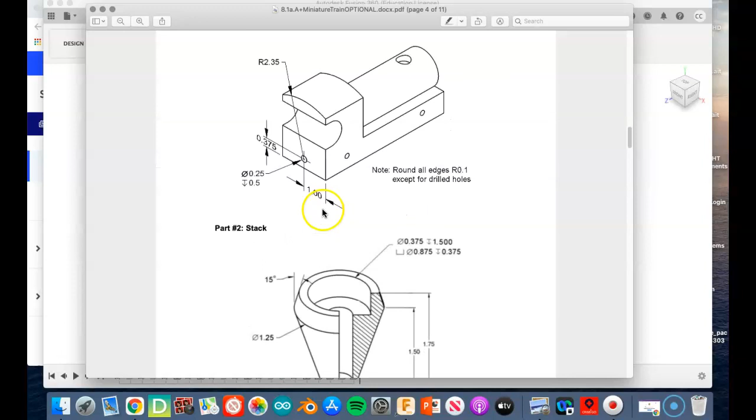Alright, train video number 2. We are going to make the stack. Now the stack is, let's pull that up real quick. The stack is looking like this, and there's a few different ways to make this. I found my preferred way is going to be using extrusions, lofts, chamfers, and a hole or two.

You could try to, with these dimensions, do a revolve. I haven't found that it's very successful. But it is a cylindrical object, so you could do that. I find that the extrude, then loft, then extrude, then chamfer, then drill a hole. That's my plan, and I'm going to walk you through that plan.

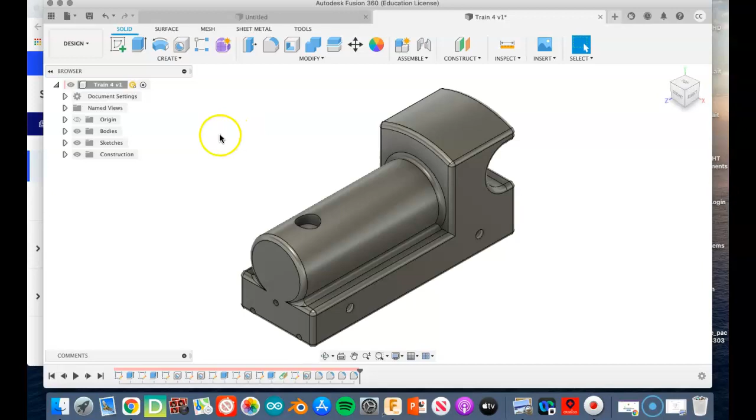So here's the train body that we made, and don't be alarmed, but we're going to make the body disappear. And now we're going to make a new sketch. We want to pick a plane. I'm going to pick this bottom plane here, this top-facing plane. And I'm just going to kind of come over here in space because I know the train is hanging out here somewhere. So I'm going to basically draw this thing off to the side with the intention that I would assemble it later. So I'm going to convert it to a component later and just assemble it using that joints thing that we did in class today.

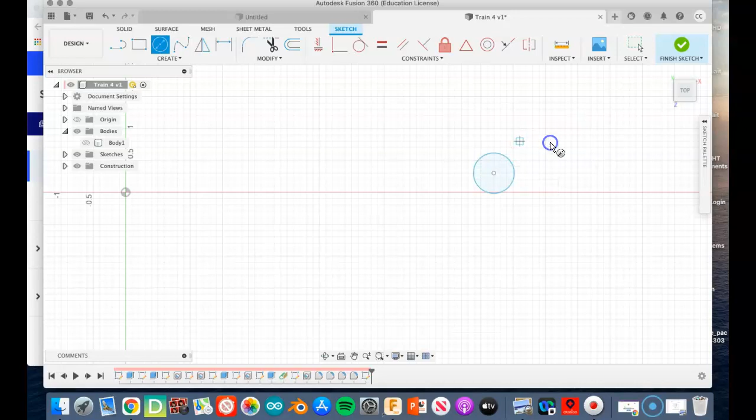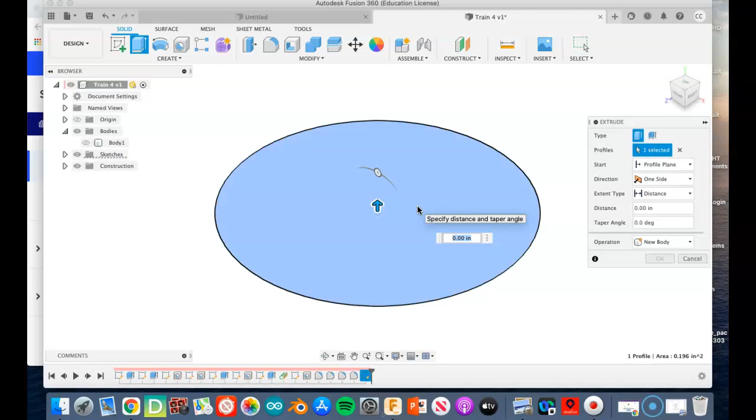So starting at the bottom of the stack, I'm going to dimension this circle 1/2 inch because that's what it says. And I'm going to finish the sketch. It should maybe hit the home so it gives me a little look. Now I'm going to extrude this, that first distance, which is 0.25. So here it goes, 0.25, and I'll get a little thing that looks like a hockey puck or something, right?

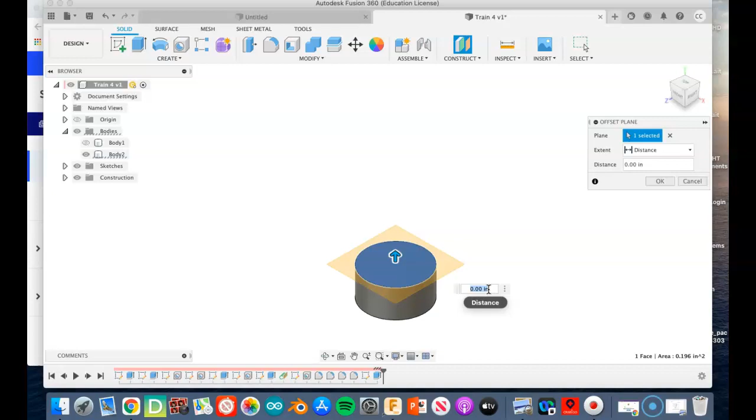Now, my next move is to loft up to another circle that's up here somewhere. So what I'm going to do is use an offset plane. I'm going to click this surface and then assign a value in the box here. And the difference, the top of this, where this circle needs to be drawn, is 1.5 from the very bottom. So we could say 1.5 minus 0.25 to get the difference. And that's just going to put this plane up here in space. And now that I've got a flat surface up there in space, I can put a sketch on it.

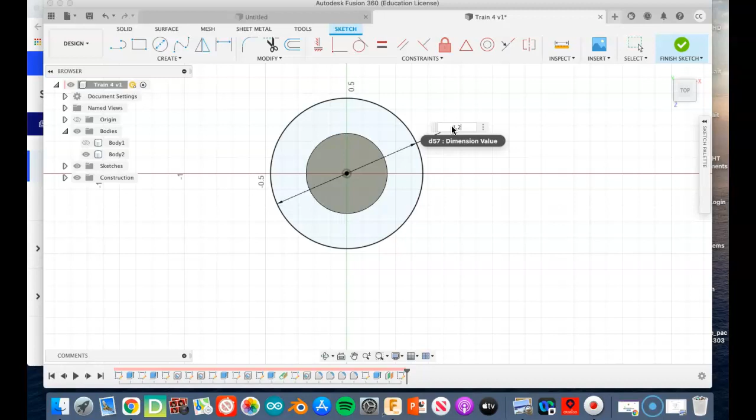I'm going to go ahead and draw the circle. I know it's bigger, so I'll click that, and then I'll click Dimension. And how big is it supposed to be? Well, it looks like it's a diameter of 1 1/4, 1.25. And there you have it. So we're going to finish the sketch. And now here's the cool move where you loft. A loft is hiding under Create, so find Loft, if your mouse works.

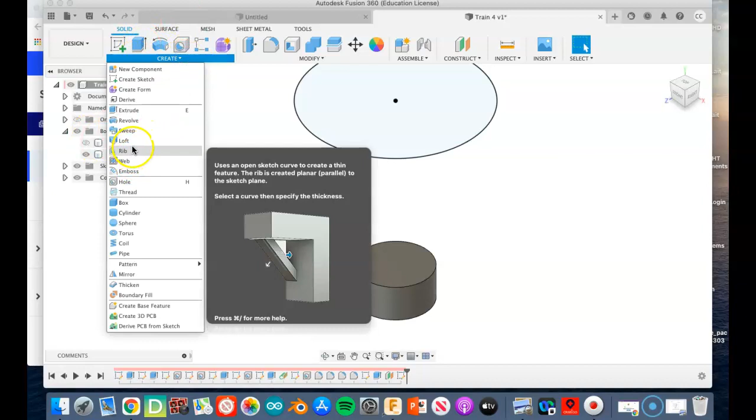There you go. My mouse is intermittent. All right, so I click the top of that. I click this. Why don't you worky? Let's cancel. We'll try again. Choose loft. Try to just get this edge right here. If we just get the edge, right? Not the whole face. Oh, there it goes. Boom. So now we've lofted from that to that.

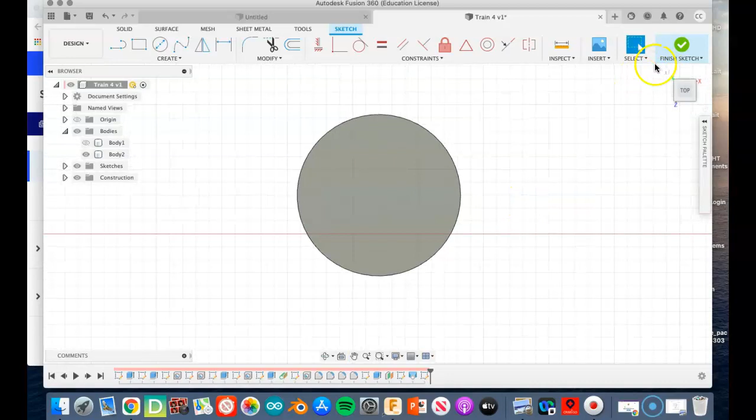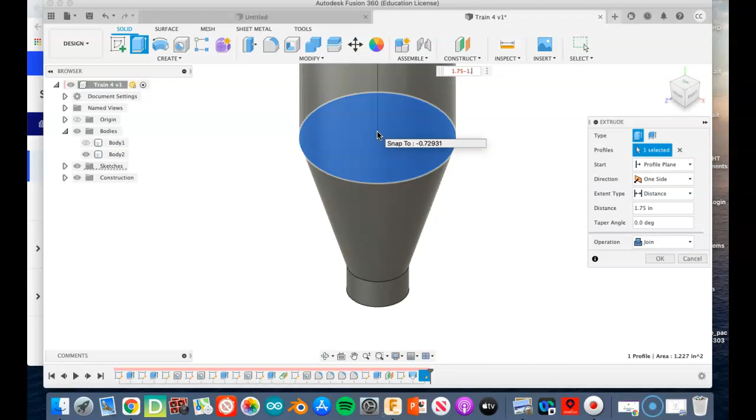And we're going to put a sketch right on top here. Actually, I don't think you even need with this program to put a sketch. This is a habit that I've got from a different program. So you don't really need a sketch there. You could just hit extrude, and this program knows that you can just extrude this straight up. So the distance from there is another 1/4 inch, but it's listed as 1.75 minus what you've done already. So that'd be 1.5. And so there you have it. This is the top part.

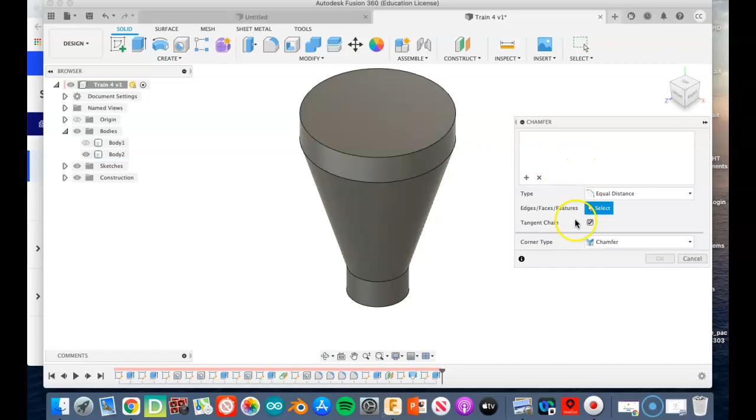Now we're going to stick a chamfer right here, and this one's tricky. The chamfer is 15 degrees from vertical. So we could think of that as being, what, 75 degrees? I don't know, but we'll figure it out because that's what we do. We're going to do, let's see, not equal distance because that would give us 45. So let's do distance and an angle. Here's the edge we want to do.

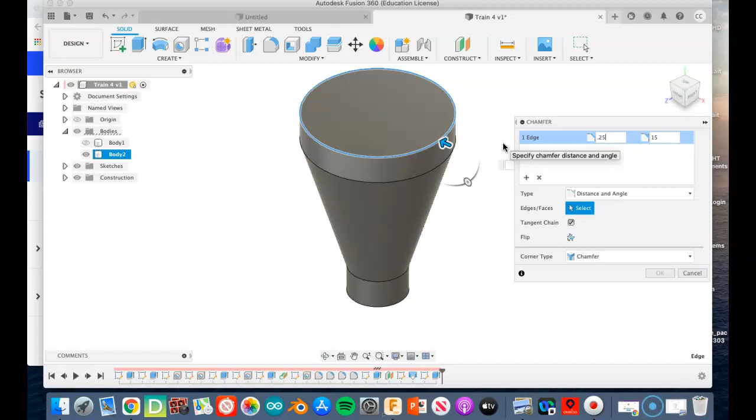The angle is going to be, let's say 15 degrees. And the distance is that difference, so that's 0.25. Oh, gotta type it in the right spot, my man. 0.25. How does that look? That looks real wrong. So, I think we need to use the other angle.

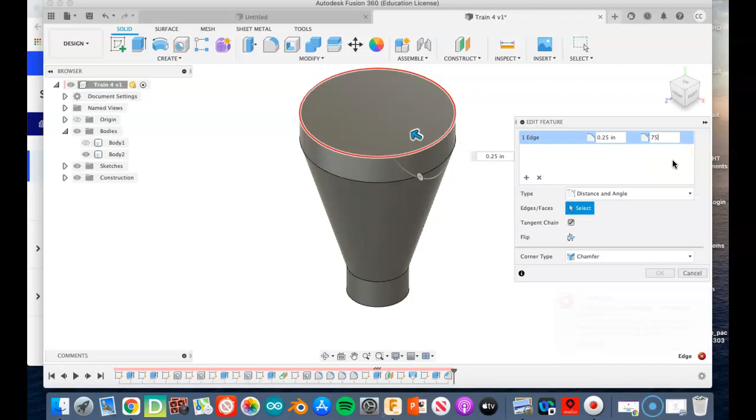So not 15 degrees, but let's use the converse or whatever. We'll say 75 degrees. How's that looking? That's not looking good either. That's okay, because we don't quit. We just keep trying. I'm going to go ahead and maybe I'm going to delete this chamfer and remake it.

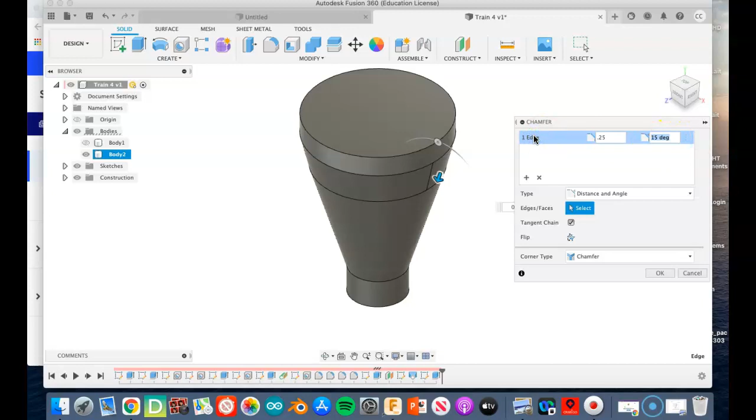So let's find chamfer. This time I'm going to select this circle down here. I'm going to use that 15 degrees, right? And I'm also going to use 0.25 and see what happens now. No, that's not right either. Or is it? Nope. So let's try 75 degrees. What does that do? Nothing. What if we say, oh, can we pull the arrow the other direction? That doesn't do anything for us.

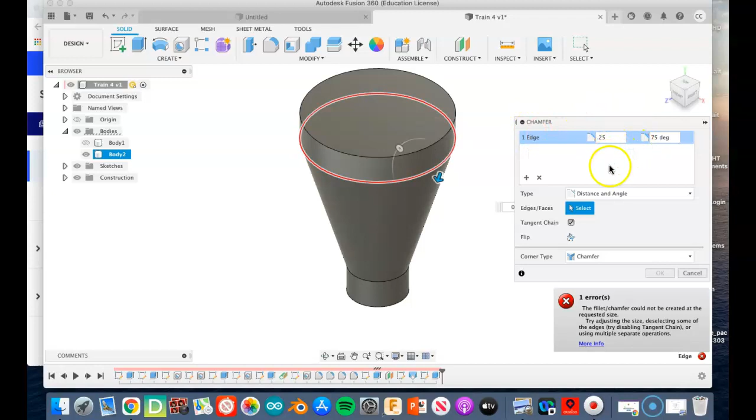Oh, let's try this. We'll make that 0.25 like it was before. And let's try flip. What does flip do? Oh, that's bad. That's even worse than it was before. But let's make this 15 degrees. That's not good either. So you can see I'm struggling here. That's okay. So I'm going to cancel. I don't have a chamfer, so I'm going to make a chamfer. It's okay to struggle, folks.

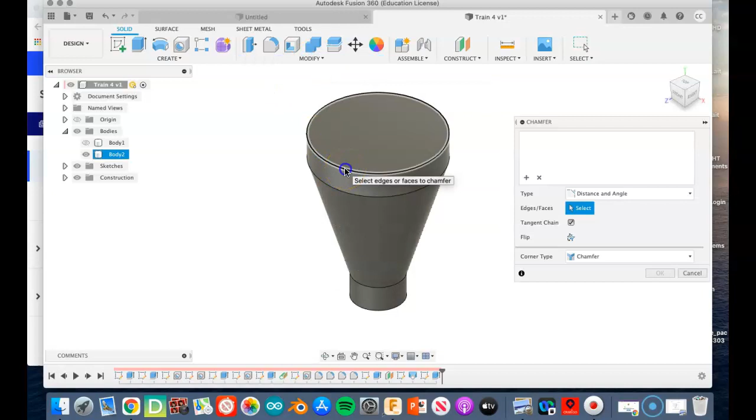So we're going to do a distance and an angle. The distance, we know that's got to be 0.25 somehow. We know the degrees is 15 somehow. That's wrong. So if we hit flip now, oh my gosh, it's perfect. Struggle is real, people. It's been a long day.

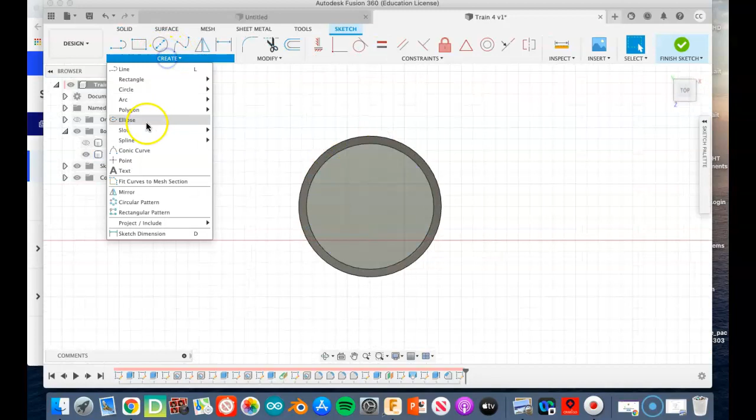I'm going to put a sketch right on the top. I'm going to put a point right in the center. Can I get the center? Boom. And finish the sketch. Now it's time to drill a big old hole. Zoink. And this hole is a little more complex because it's actually two holes combined to make one, and it's called a counterbore hole.

And if we look over here, we've got simple, counterbore and countersink. We want to choose counterbore, and we get a whole bunch of different dimensions that we can put here in the box. So the first one is the overall depth from the very top of the hole to the very bottom. And if we look at the hole notes over here, I'm actually going to pull that up so we can kind of look at it together.

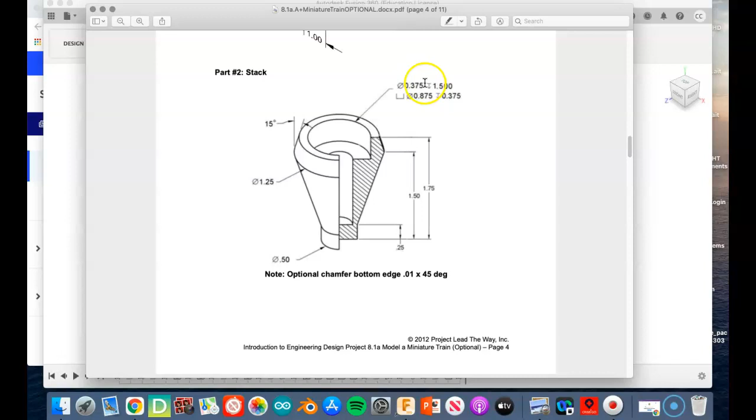Right here is the hole notes, and this is saying the fat part, the counterbore, is a diameter of 0.875 and a depth of 0.375. The smaller part is 0.375, and it goes all the way from the top down 1.5. So here it comes, folks. So the overall depth was that 1.5.

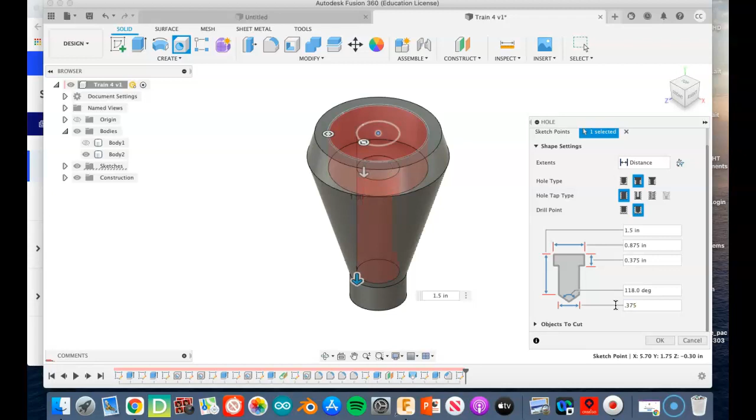The wide part was 0.875. The depth of that wide part was 0.375. Was it 0.25 or was it wider? I gotta check one more time. No, it was 0.375 down here for the smaller of the two diameters. Excuse me, 0.375. Boink. Now you're like, man, I'm glad you didn't give up. You are the best, right?

I could convert this to a component right now, and the body to a component right now, the train body, and then insert this into here. But I'm just going to leave it and call it quits on this stack video.